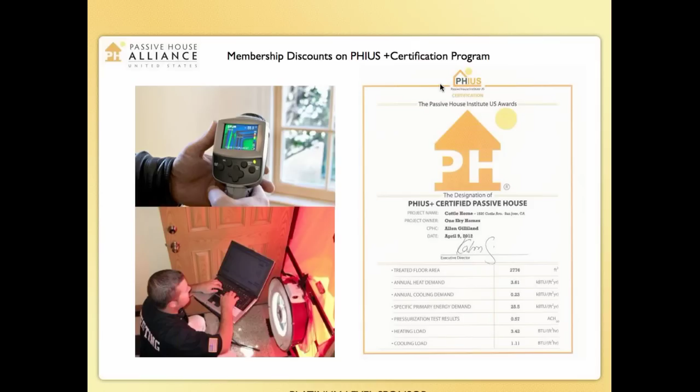Your professional level membership also provides you discounts to the PHIUS Plus certification program. So as you can see, just taking advantage of a few of these things has paid for your membership completely.

The Alliance, a big part of our mission is to do outreach, and the way we do that is our weekly newsletter. We're also involved in various events around the country.

One of the greatest partnerships that occurred just recently is the Challenge Home connection with the Department of Energy that PHIUS has created. So now if you have a PHIUS Plus certified passive house project, it will automatically qualify for the Challenge Home certification as well as the Energy Star designation. Everyone's very excited about this new relationship.

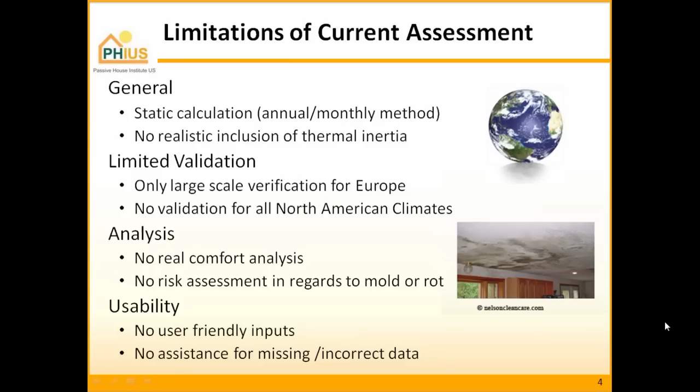Last but not least, and maybe the biggest plus for me that came out of this whole WUFI Passive exercise, in the ideal world, is the organization of workflow. As you could see in the previous slides, if you have a whole set of different modeling tools to assess energy performance and dial in your design—and this is the key word, we're still in the design phase—using all these different, unconnected modeling tools creates great potential for error. We have to update all four, or three, or however many we're using. So it's a really great advancement to now have essentially all these tools in one.

You can now use the passive verification mode. You input all the geometry of the building, all the R values, all the component descriptions, and that same set of dimensions is then used by the other components—by the dynamic model, as well as, in the future, the thermal bridge calculation model. That module is currently still under development, but it's envisioned to happen during this coming year.

Also, a great new improvement is that we now can actually calculate the entire building from the perspective of performance. That means we can now see the impact of the exchange between the opaque components and the interior temperature differentials, humidity, humidity storage, and lag. That can now be calculated into the energy model. So for cooling-dominated climates, that might make a big difference in results. And that's the conclusion right here, better cooling assessment.

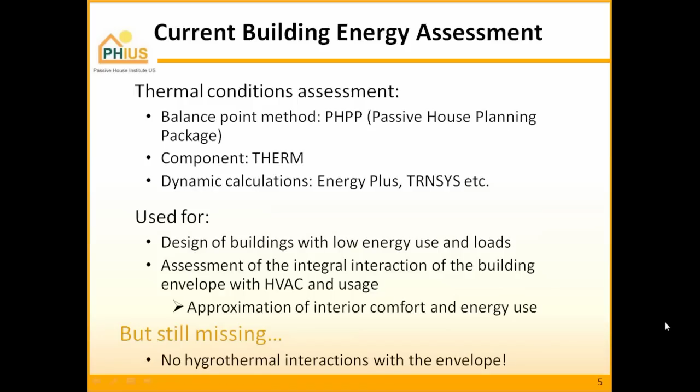Also, the capability to optimize and minimize the mechanical system is very critical. As long as one has a simple building and a simple mechanical system, that doesn't make that big of a difference. But as soon as we get into more complex buildings with different zones, and this tool can calculate different zones in one set, we might have different schedules for mechanical systems, or different mechanical systems altogether. At that point, it gets very difficult with a simplified tool to really dial in the mechanical system for comfort in a particular climate, especially in more challenging climates with high humidity and cooling loads.

So if we move on to the system climate factors for our design here, this is just to give you an idea how complex that quickly can get. We have all these different factors in the United States, many different climate zones, 8 altogether. Alaska is not shown right here. If we overlay all these different heating degree days, cooling degree days, winter design temperature, summer design temperature, humidity, precipitation, solar radiation, night sky radiation, and ground temperature, and as you know from experience with modeling and PHPP, this all has an effect on the overall model, we get very complex patterns very quickly.

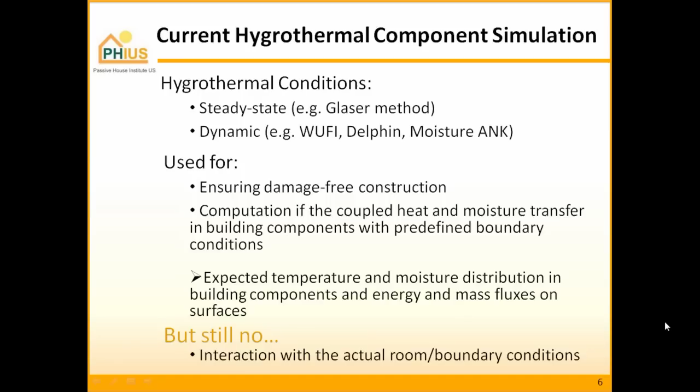So all that said, what we hadn't created so far, and I'm glad to see now that the Global Building Performance Network out of Paris has actually done this research. They have a similar mission statement to us: they want to make passive building commonplace worldwide by 2020. So they have quite a challenge ahead of themselves. I think country by country, this is already a challenge. But thanks to them, they tackled this worldwide comparison in terms of climates.

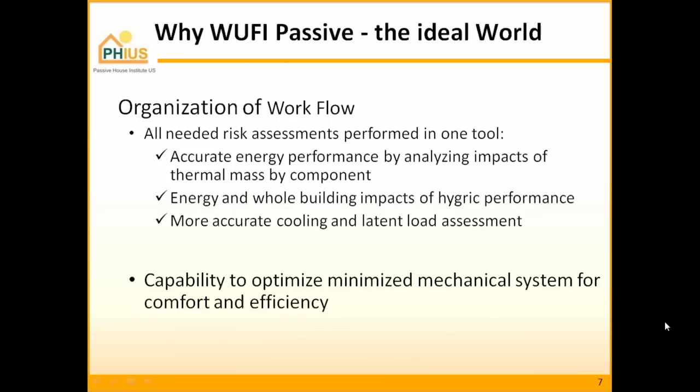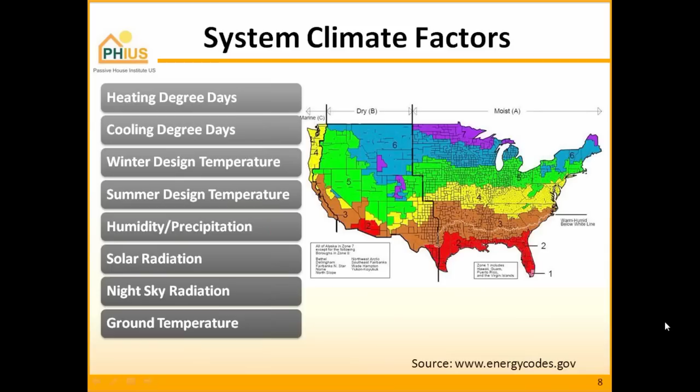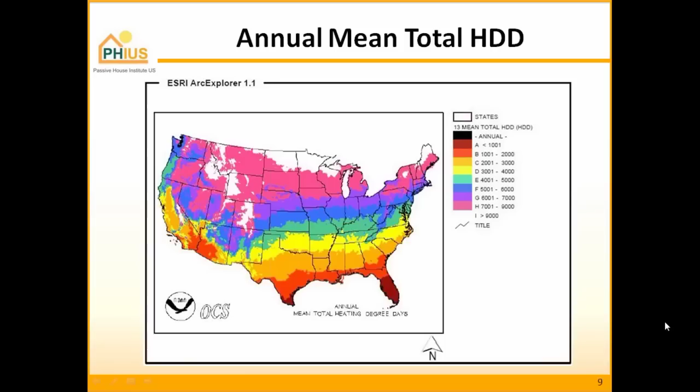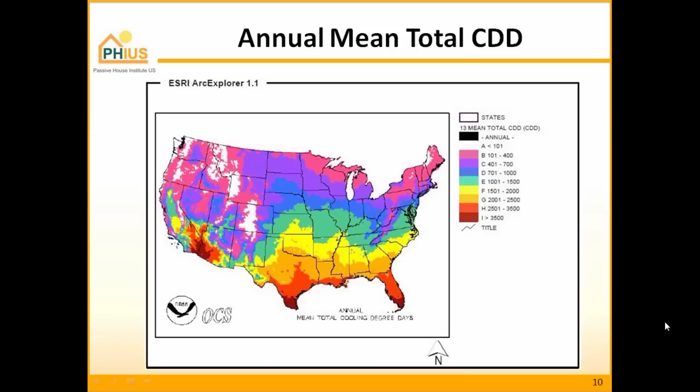That's the full range we have to design for in North America. Now there are a couple of climates where it gets easier, where some of those things disappear. For example, the high desert is perfect at that point—the heating almost drops off. It's very interesting how things change there.

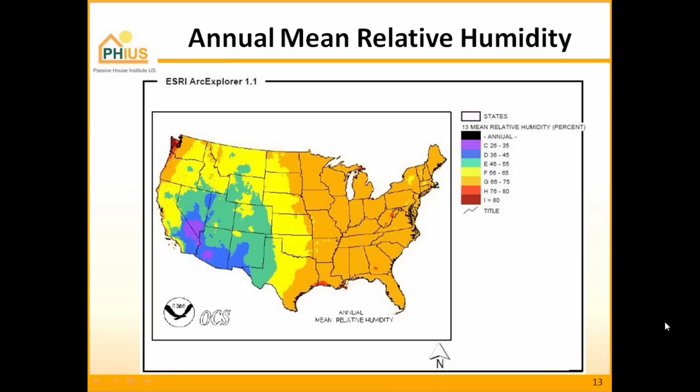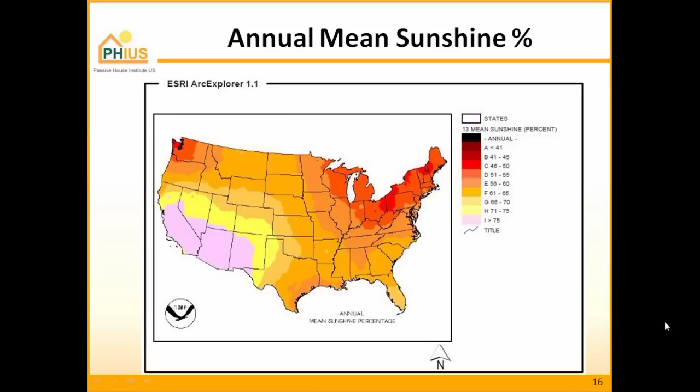Balance-based means it's essentially the same energy modeling process as PHPP—the exact same thing. We're following the exact same calculations; these are all well-known formulas. So once you perform a calculation in the static simplification side of this new tool, you should receive the exact same result as the Passive House Planning Package.

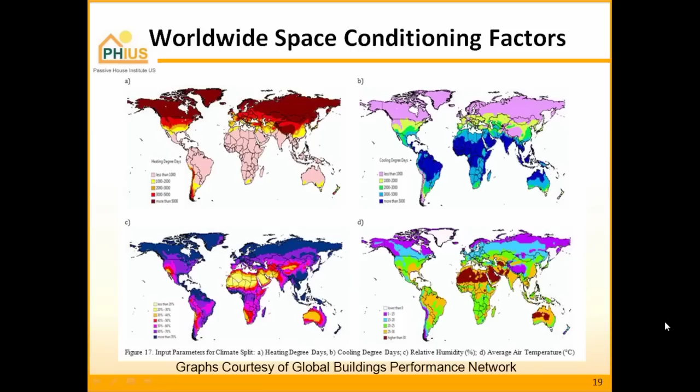We can model how the exchange between opaque components and the storage capacity for moisture can affect humidity and comfort, and so on. In addition to that, we have our WUFI Pro hygrothermal envelope simulation—probably the one most of you are familiar with. That's the function currently available for free in the WUFI 1D version from ORNL.

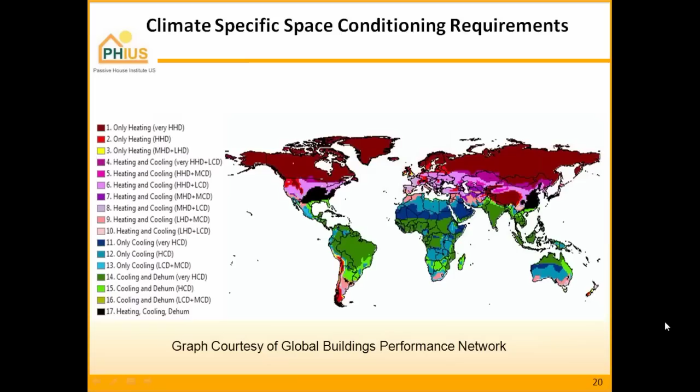So essentially, those three functions give us the whole building simulation options. If we feel confident we're in a simplified climate, mostly heating dominated, and we don't have issues with cooling, humidity, comfort, or too much solar radiation, we're fine staying in the simplified Passive House version. But if we feel we really need to check—maybe there's a hygrothermal issue with the walls, we're not sure if the vapor retarder is in the right place for that climate, or we're not sure the cooling calculation is accurate enough and want to see what the thermal mass does—then we switch to these dynamic modes.

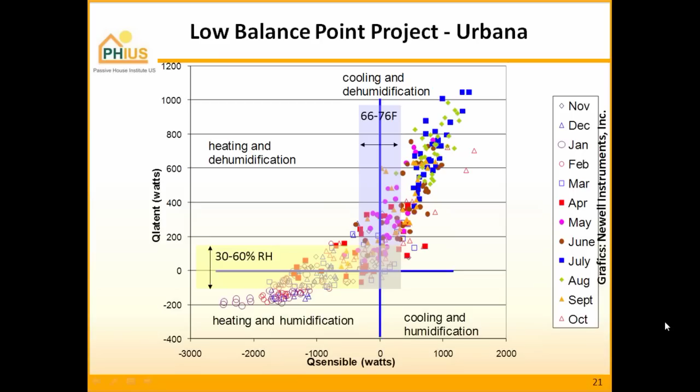So if you're working on a multi-family project, for example, you have 4 stories apartment passive house building above, and let's say a commercial store. At that point, you can create a second zone to separately calculate the store, the commercial space by itself. Also, you can copy these cases.

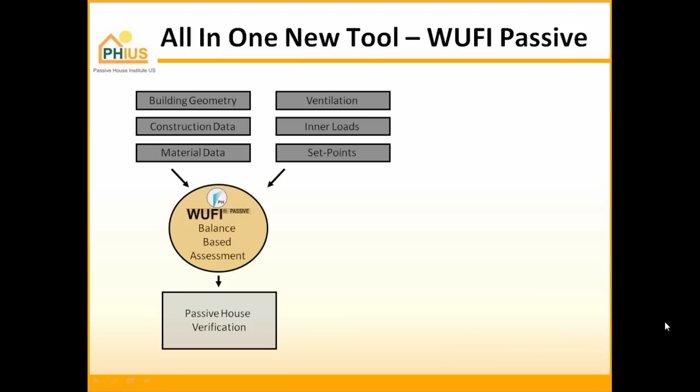This is something that got me really excited. I found myself getting so excited in PHPP many times, being able to switch everything around and seeing the different results of the different changes. And then I did it so many times that I couldn't remember what exactly I did. So I tried to come up with very time-consuming logs to keep track of my changes.

And that's all possible with Excel. That's perfect, you can actually build those things. But in this one right here, you can just copy a new case down, call it case 2, and then you keep track of all your cases. It will manage those within one file. So that's a really nice new addition to this thing.

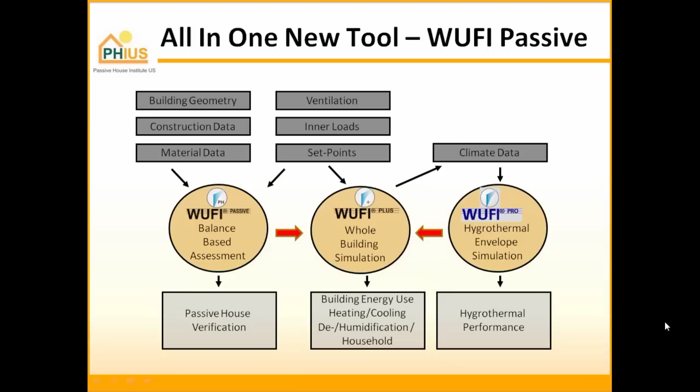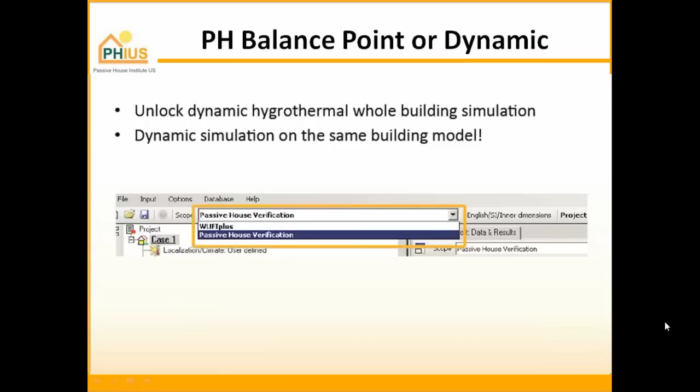This is a brand new module that Fraunhofer software developers have created specifically for the passive house community. They did not have the capability in WUFI Plus or Pro to calculate inhomogeneous wall assemblies in terms of R-values. So they developed this whole new model for the passive house community so that we can get our stud walls in there and correctly calculate the reduction of structure inside of our wall modules, just like it happens in PHPP.

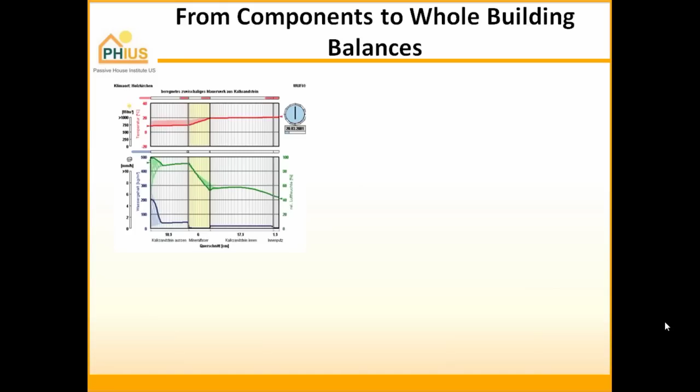So that's very cool. As you can see right here, there's a 3D interface. You can actually draw this in 3D. You can even click on your module and spin it around. So it's very nice. In addition to that, there are a whole bunch of databases already stored in the tool.

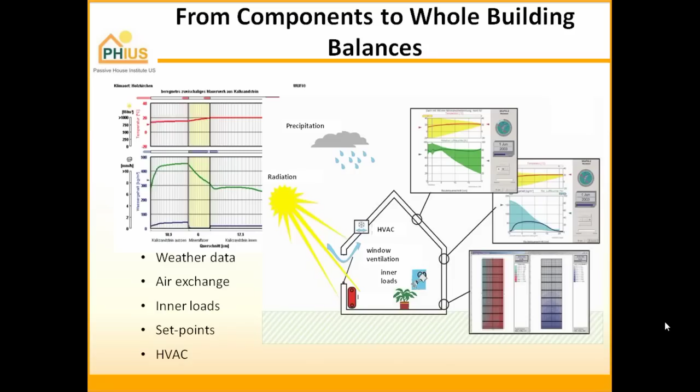Fraunhofer is very serious about supporting this tool and continuing to develop it. They have launched it worldwide. This is not just a US or European thing. They are, for example, looking at the market in Korea right now, and Japan. So once you get the software, you'll find there are actually databases in there for various Asian regions, Japan, and so on and so forth. Quite interesting, they are really seeing this as the way of the future.

So that ties us back to the global performance building network. They are really indeed envisioning this level of energy efficiency for the worldwide market, the international community, which is good news. This is excellent news.

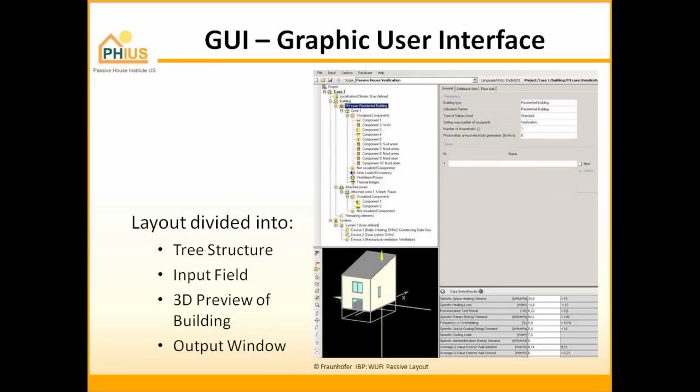All right, so the passive house input components, this is actually your little image where you can kind of take it and grab it and spin it around. And this is where you start building your inhomogeneous components, brand new, hasn't been there before. Again, you can build your own wall assemblies. There's a materials database. There are already a few materials in there, but you can then save your own. And once you have the material database built that you always use, this should go really fast. You can very quickly choose from that database, and it pulls it up automatically.

We are also planning on building databases for product manufacturers and enter them into the databases directly, so for those folks who buy certain products, they can then choose from that as well. But that's still in progress, we are not there yet. And the same would be true for mechanical systems.

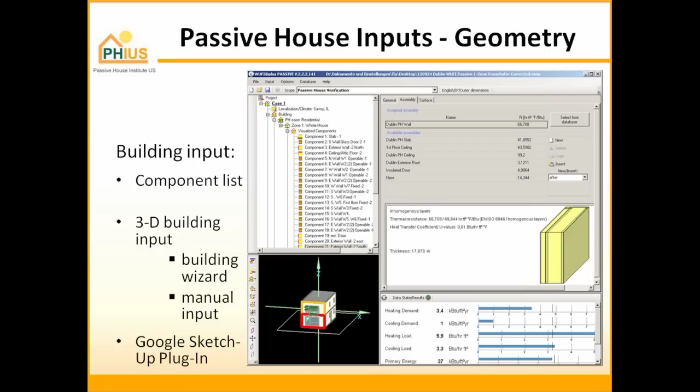Quickly as a summary for the passive verification mode in WUFI Passive: we have instant calculation and case comparison. That's going back to that tree structure where I told you you can store essentially infinite cases, as many as you like. We have automatic area calculation. So if you bring in your project from SketchUp, or if you draw it in this little drawing wizard, you can also draw inside of this software. It's a little rudimentary, but it works. So at that point, it automatically calculates all the areas. You don't have to calculate anything, it just outputs it.

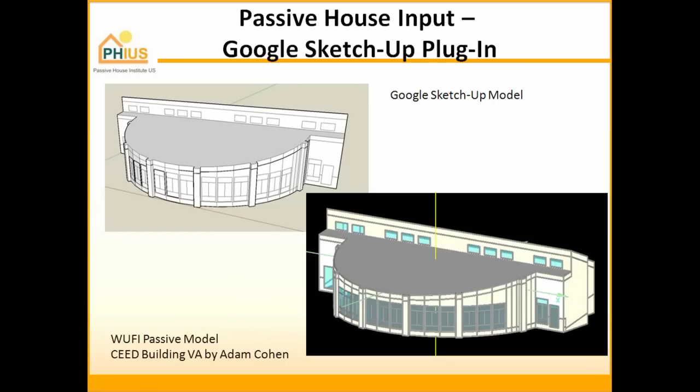3D visualization - I found myself being very happy about that. I wasn't so sure if I really needed it, but once I had it, I'm like, yeah, I am an architect, so that was a bonus for me. Google SketchUp import for more complex units. We have SI/IP units back and forth. User support through PHIUS and Fraunhofer, input in decimal feet and inches, additional calculators like for example for TFA, pop-up that you can choose when you get to those particular areas, and the databases which will keep growing specific to the North American market.

And at that point, this takes us to the dynamic simulation. Now, the dynamic simulation is as easy as I said - you go back up to that drop-down menu and you toggle to WUFI Plus. And there's a little bit of a catch to this before I move on. So essentially, it's a good catch.

Essentially, Fraunhofer gave us a really good deal when they approached us and said we need X amount of dollars for this tool. We said there's absolutely no way our community will be able to pay this much money. And they said, well, okay, we're going to cut you a deal.

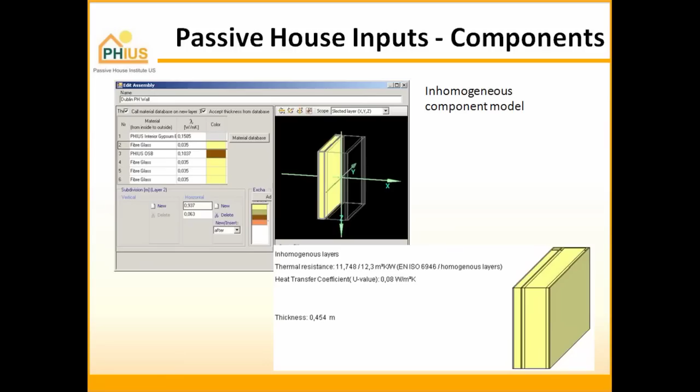Essentially what they're doing is giving us the full WUFI Plus modeling tool, which as a standalone is a very expensive professional tool. I think they're charging roughly $6,000 for that, and that's for a lifetime license, which in their terms is 10 years, so you get all the upgrades and updates over that time. For the Passive House community, they're giving this to us for 2,100 euros, and that's quite amazing.

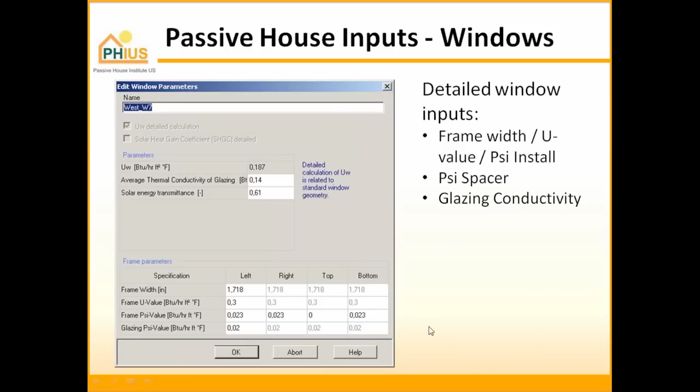Now where's the catch? How do we get basically the whole thing for half price? Well, they're saying if you truly work in Passive House design, you've got to be within 10% of the Passive House certification criteria before that dynamic simulation unlocks. Now that's an okay idea.

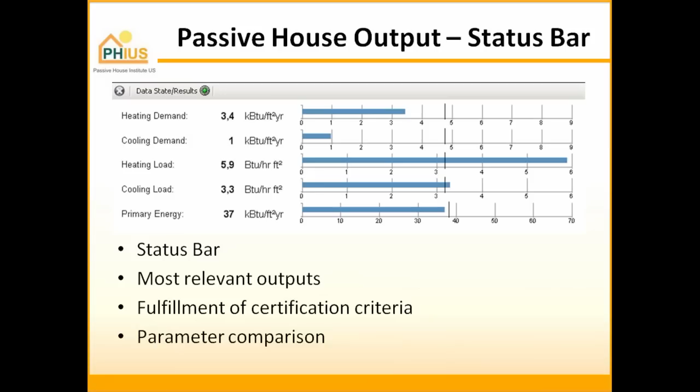We still have to go back to the negotiation table on that one, because when we agreed on this, we weren't really thinking ahead about retrofit. So we will have to find some way to qualify retrofit projects to unlock at a higher level. Anyway, that's in the future. But the great news is Fraunhofer is super responsive—any kind of input we've given has had excellent feedback and immediate results implemented in the software.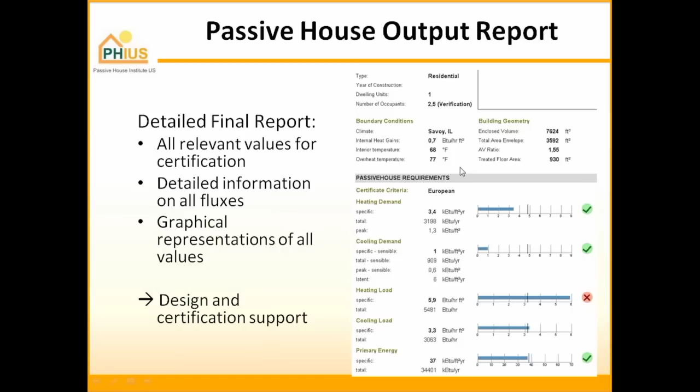So now, what do we do on the dynamic side of things? I already mentioned schedules for HVAC equipment. As of right now, it's very difficult—as soon as you move from a very simple small building to a more complex building where there are schedules, like you turn the ventilation system off overnight, or even have different schedules weekly, like on weekends everything is off and it only kicks on during the weekday—we can't really predict comfort with a simplified tool.

In this one, you can enter as many specific schedules and set points, ventilation rates, and interior loads as you want. You can specify that absolutely exactly accurately, comparable to EnergyPlus. So this tool is able to handle quite a bit of complexity.

Components: in regards to components, what we're interested in here is the thermal storage of the materials close to our interior space and the hygrothermal properties. We want to know, can these materials actually store and buffer some of that humidity? That's going to be very interesting in humid climates. And then, of course, also if we have any sources in the assembly.

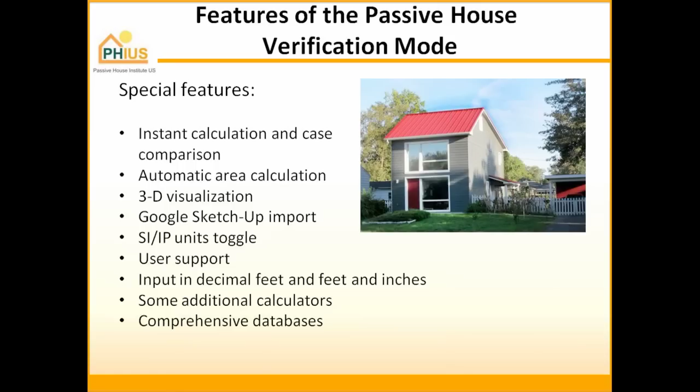I don't know how many of you have used that little faucet option in WUFI, where you can actually create a leak in your wall assembly. This might actually not be a bad idea for Passive House assemblies to play through, because we have so little drying potential—we have an airtight wall. If we really want to check a worst case scenario, we might want to check sources in the assembly, meaning also a potential leak.

This tool now actually allows us to dial in windows much more accurately than the PHPP did. There we were only able to guess.

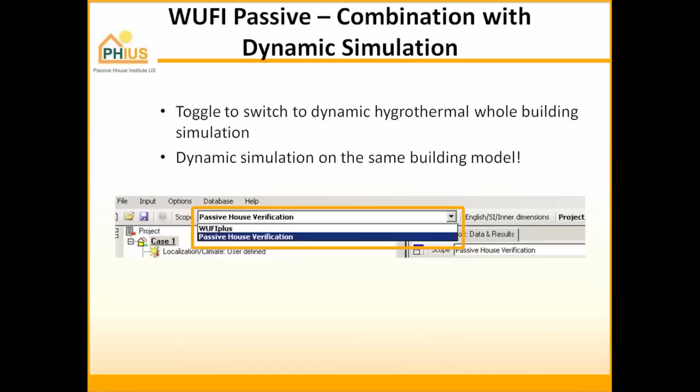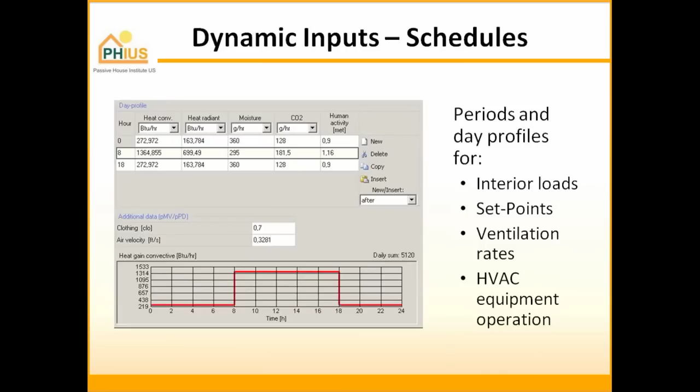All right, export functions—there are a whole bunch of export functions for all the data in there. I don't want to dwell on this too long since we're running a little over.

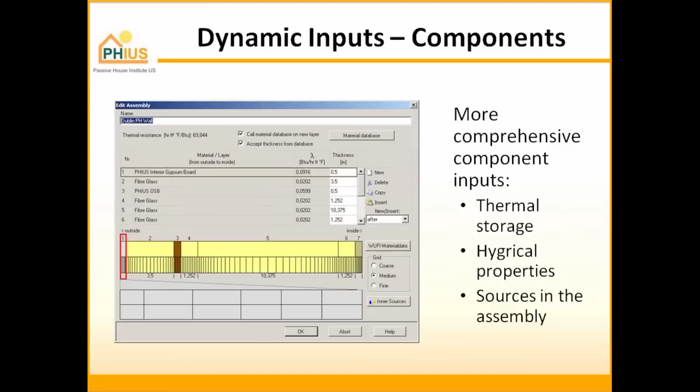Quickly, a summary of the WUFI dynamic mode and what we can do with it: we have the dynamic hygrothermal whole building simulation, and that will impact our final energy criteria. So whatever it says in passive house verification might now be updated by additional impacts of thermal mass and potentially humidity storage. Then we have an easier to use graphical interface right here.

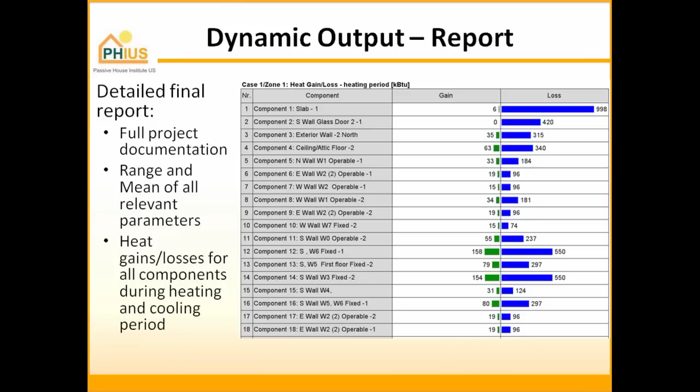That's the same thing—multi-zone model, that's a big deal, because we can now actually assess comfort in multiple zones. These things are the same as WUFI Passive: 3D visualization, Google SketchUp, IP, and SI, plus extensive databases for materials, comfort analysis, and hygrothermal component analysis.

That's just quickly a summary, and I think I have just a couple more—examples for additional modeling options.

Now, I'm not so sure if this is already implemented, but that's what Fraunhofer is working on as well. Many of you have run into the snag when going for certification of underestimating the shading, and we are now asking for actual on-site verification of the shading percentage. This tool will soon be able to give you a pretty accurate number for the shading of your surroundings. Not in there yet, but that's the plan.

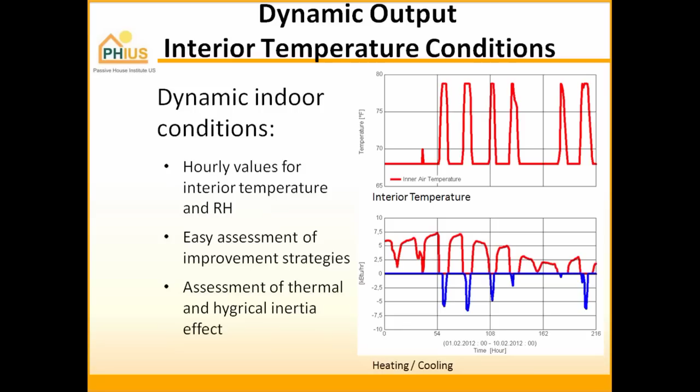Various ventilation strategies are already in there. Thermal and hygrothermal inertia are already in there. Different utilization patterns—yes, you can absolutely and totally specify it to the T if you have a commercial building. Insulated shutters, you can model this right now. And all that in dynamic mode leads to better envelope optimization.

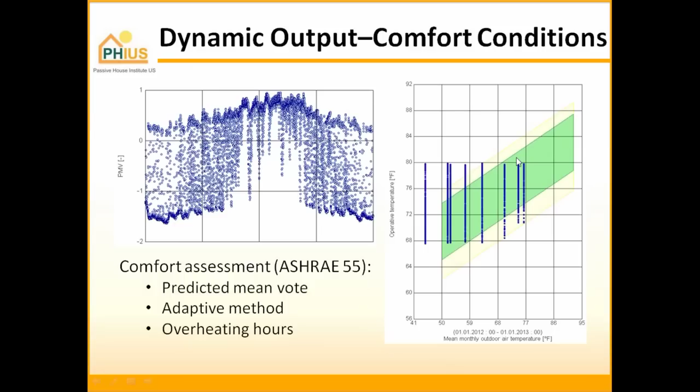Overall plan improvement—so I mentioned this previously, thermal bridge, yes. Now imagine this tool with thermal bridge calculation added to it. You don't even have to deal with THERM anymore. Fantastic. The first module is already built.

You can kind of walk around in it. I think there might be a slide actually—oh no, there's not, but that's also really, really quite cool. In fact, it's more accurate than THERM because they're building it in 3D hourly simulations. So now even for the thermal bridge calculation, we can take into account convection in the corners where we're trying to calculate a thermal bridge, for example at a slab connection to a wall.

Absolutely, totally cool. Also important for windows, for example, because windows might not perform the same in hot climates as in cold climates. What does the convection in front of the window do to the thermal performance, and so forth? All of that can be assessed through this new model as well.

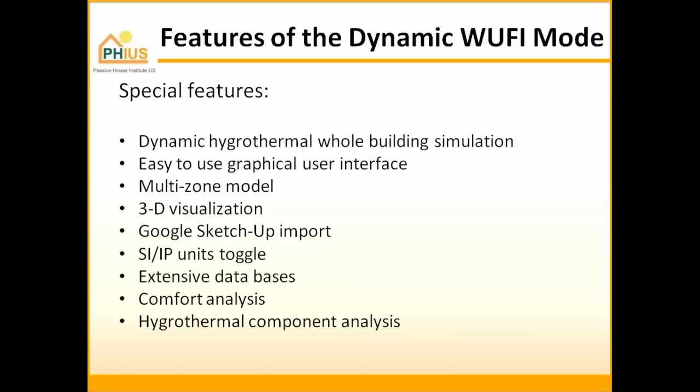Passive house verification, all the same stuff we were able to do before, plus a couple of new features. We have output certification documentation, which is really awesome, and standard adaptation is in the offing. Fraunhofer has vowed to do their best to research and move that forward as well.

And dynamic simulation—now we can model our HVAC more precisely, but of course we're not stopping here. We're also looking to make it better, looking for net zero and plus energy plugins that allow us to design the perfect system that takes us to either net zero or plus energy.

And I was mentioning this up high with the THERM model, the enhanced dynamic window model. That's something really exciting from a building science point of view, so I can't wait to see that develop.

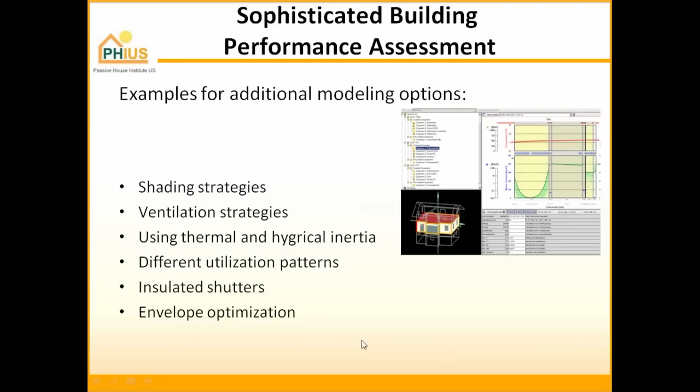Summary: why WUFI Passive? The most important argument for me is it's one tool that is a risk assessment tool for the designer, for the architecture office. You eliminate potential for mistakes. You have it all in one file. If somebody comes to you and says this building failed terribly, you pull out that one file and say, I ran the WUFI, I ran the THERM, here are all the calculations, and it wasn't me, essentially.

We have a user-friendly interface, the workflow itself. You can manage your iterations easier. Also a big plus if you are the boss: if you're not the person actually running the model and you're head of a larger firm, you won't be able to go into detail and know about every decision being made, but having this all-comprehensive tool, you can go in and at least spot check to make sure everything is correct. We have an easy toggle between verification, static, and dynamic simulation based on what level and granularity of outputs we'd like.

Pre-entered databases, you build your own. And the result export functions—I wish I had a shot of the pie charts right here, pretty impressive—they're in there as well.

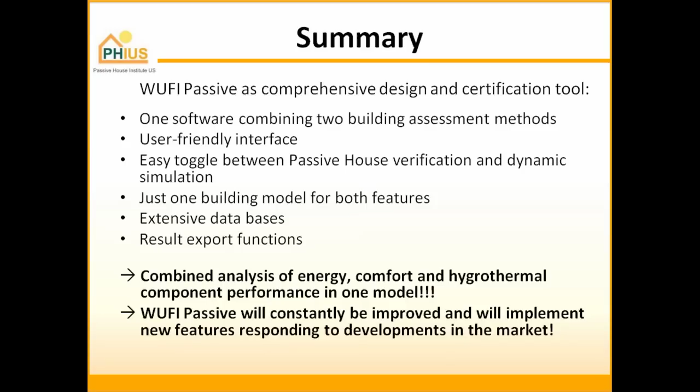Another question: looks like the software is no longer Excel-based, obviously—will all the formulas the calculations are based on still be visible? No, this is actually now the black box phenomenon, and I wasn't sure how I was feeling about that at first either. So if you prefer to build your own spreadsheets and see the formulas, the Excel spreadsheet might be the tool for you. For those of us who might not necessarily need to see those formulas, and I know them now in and out from PHPP, I'm fine—I just want a very fast, organized workflow. That's totally preference, yeah, but it's the exact same formula. So if you wonder what's behind it, you go back to the PHPP.

Another question: they're curious if the software will run on a Mac. Yes, it works with a little bit of a trick. There's one thing you have to adjust on the Mac, but that's really only one. If you don't, you get antennas sticking out of your model, which isn't impairing the model, but it looks funny. There's a fix for it.

Okay, next question: is the calculation engine used Energy Plus and/or TRNSYS, which I'm not familiar with? If not, what calculation engine is used and how was it validated?